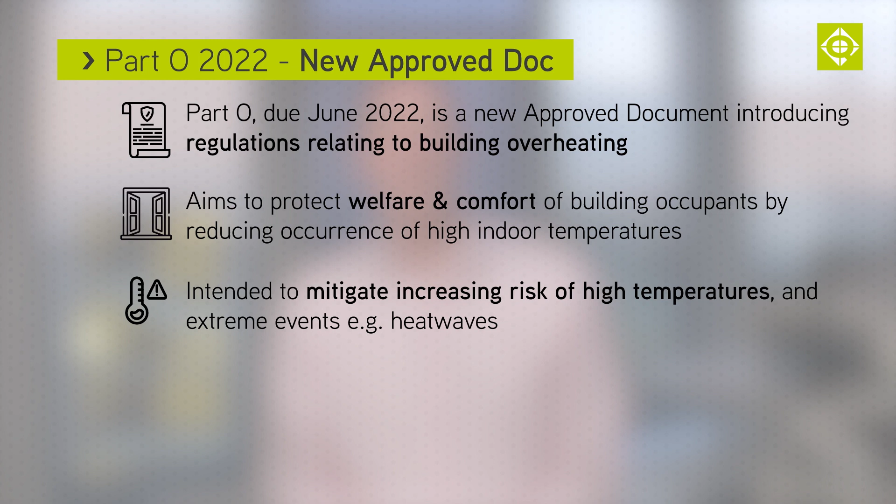It is a response to buildings where occupants have experienced high temperatures that impact on their quality of life. It also addresses the changing methods of construction, with lightweight structures or modern methods of construction becoming more popular.

The new Part O for overheating comes into effect on the 15th of June 2022. It applies to new residential buildings such as dwellings, flats, student accommodation, HMOs and care homes, but does not apply to hotels. It includes the shared and communal areas within residential buildings, such as the concierges, the lounges and the dining rooms.

In mixed-use buildings, it does not include the non-residential purpose groups or class types, such as ground floor retail or office floors. Currently, residential buildings formed by a material change of use are not within the scope of this approved document.

Reasonable provisions should be made to limit unwanted solar gains in summer and provide an adequate means to remove heat from the indoor environment. The safety of any occupant and their reasonable enjoyment of the residence must be taken into account. Mechanical cooling may only be used where it is not possible to remove sufficient heat from the indoor environment without it. Of course, the approved guidance cannot guarantee the comfort of the building occupants, as everyone has a different tolerance to comfortable temperatures.

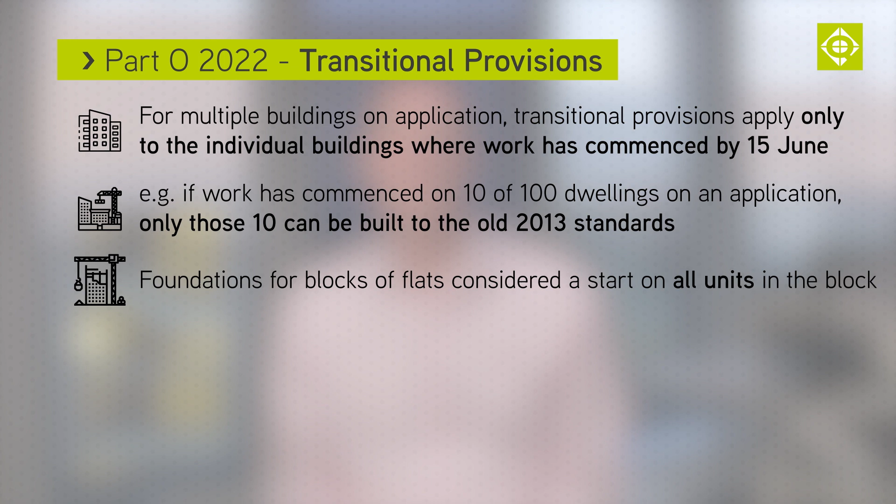For multiple dwellings or buildings on an application, work on each unit must have commenced for the transitional provisions to apply. For example, on an application for 100 dwellings, applications must be submitted and the work on all 100 units must be commenced. If just 10 dwellings have started, the remaining 90 dwellings must comply with the new Part O. Foundations for blocks of flats are considered to start on site for all the units within the block.

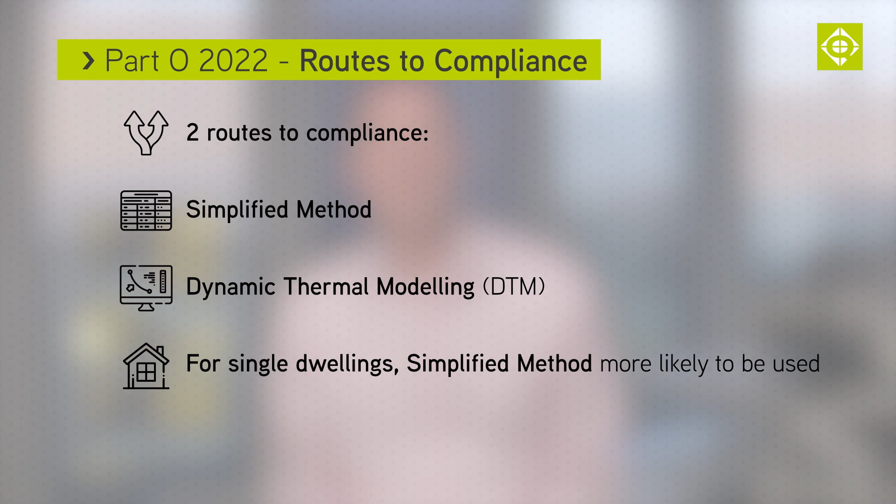There are two routes to compliance contained within the approved document. There is the Simplified Method and the Dynamic Thermal Modelling Method, or DTM. For dwellings, the Simplified Method rather than DTM is likely to be used.

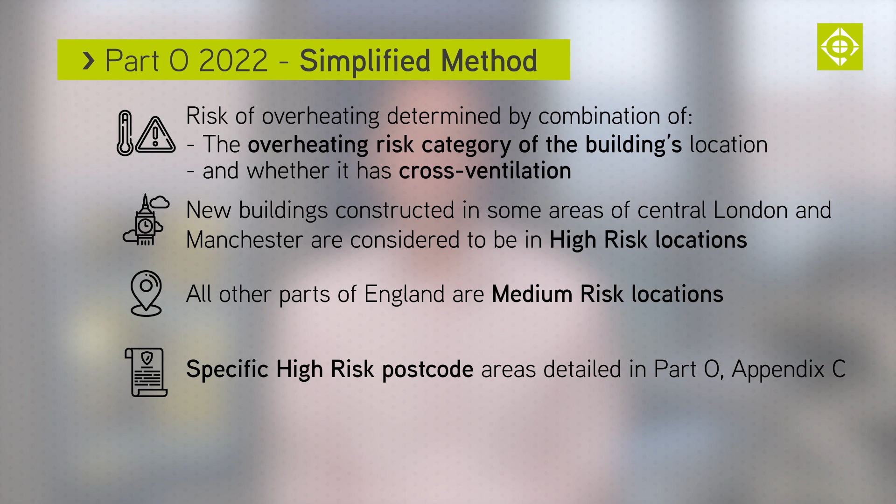For the Simplified Method, the strategy to reduce overheating is selected according to the location of the building and whether it has cross ventilation. New buildings constructed in some areas of central London and Manchester are considered to be in a high-risk location. All other parts of England are considered to be medium-risk locations. Specific high-risk postcode areas are detailed within Appendix C of Part O.

The risk of overheating is determined by a combination of the building's location overheating risk category and whether it has cross ventilation. To be considered as having cross ventilation, new residential buildings need to have openings on opposite facades. Single facade and corner flat units do not have cross ventilation. Each residential unit, shared communal room or common space should be assessed separately.

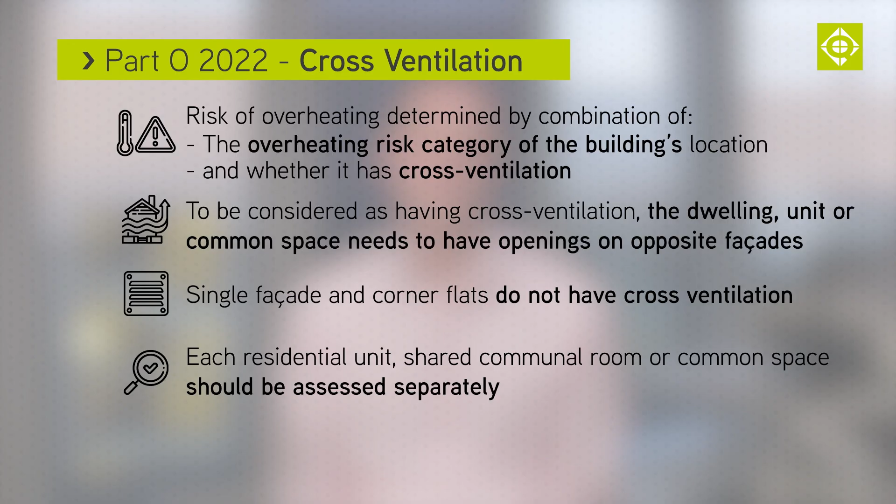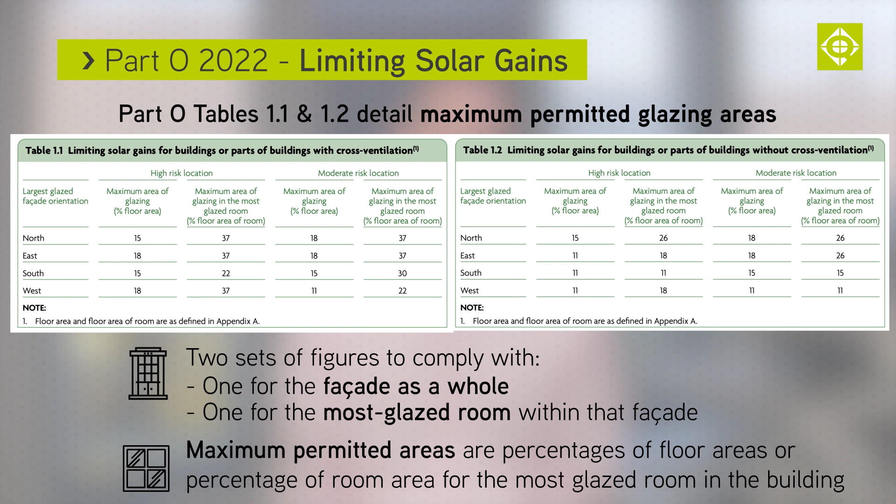Buildings in high-risk locations should also provide shading for glazed areas at certain points. Means for achieving this are detailed in the approved document.

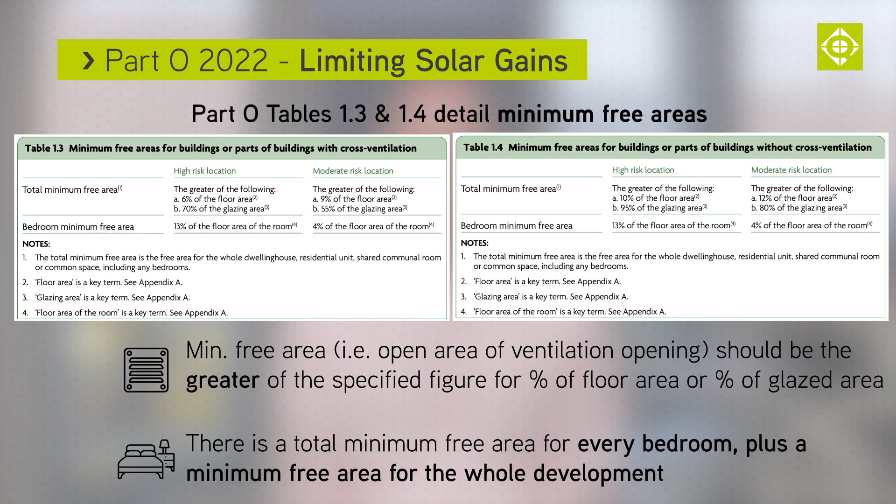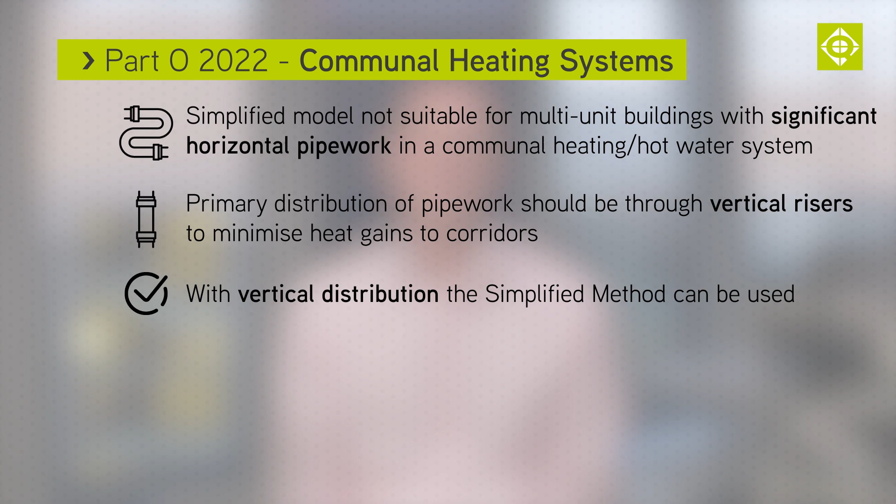The simplified model is not suitable for multi-unit buildings which use a communal heating or hot water system with significant horizontal pipework. Primary distribution of pipework should be through vertical risers to minimise heat gains to corridors. With vertical distribution, the simplified method can be used. In some cases, e.g. buildings with very high levels of insulation or that are shaded by the neighbouring environment, DTM may offer more design flexibility.

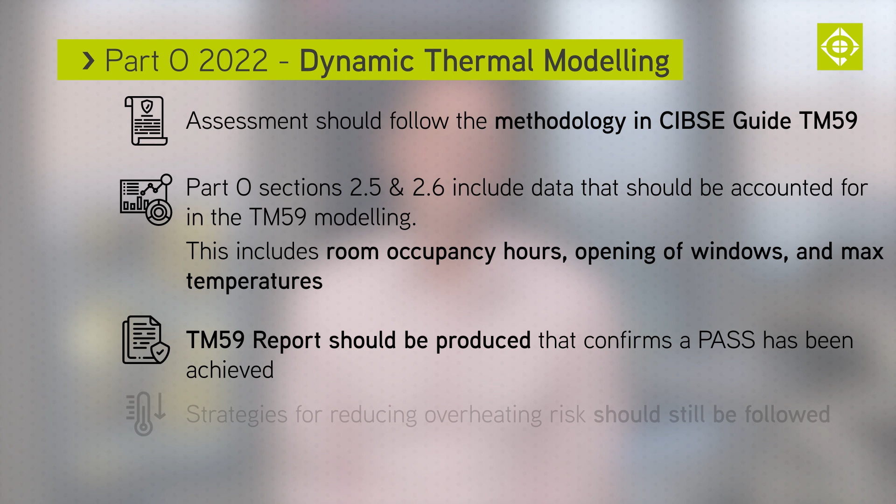The assessment should follow the methodology contained within the CIBSE Guide TM59. Part O, Section 2.5 and 2.6 details some data that should be accounted for in the TM59 modelling. This includes room occupancy hours, opening of windows and maximum temperatures. A TM59 report should be produced that confirms a pass has been achieved. Strategies for reducing overheating risk should still be followed.

Solar gains in summer should be limited by any of the following: glazing design size, orientation, the G value of the glass, the depth of the window reveals, fixed shading devices, shutters, external blinds, overhangs, awnings, placement of balconies, shading provided by adjacent buildings, structures or landscaping. However, foliage, internal blinds and curtains should not be taken into account.

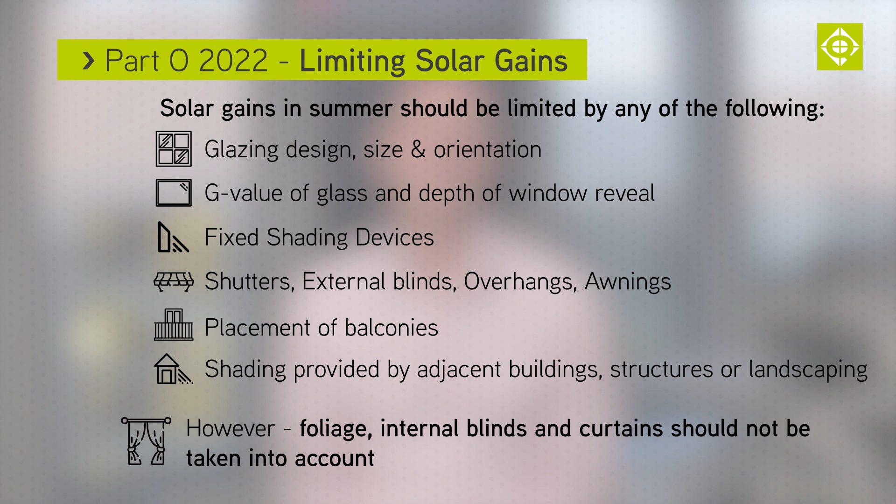Excess heat should be removed from the residence by any of the following means: opening windows, ventilated louvers in the external walls, mechanical ventilation systems and mechanical cooling systems. Passive means should be used as far as is reasonably practicable. Mechanical cooling can only be used where requirement O cannot be met by using opening windows or other passive means.

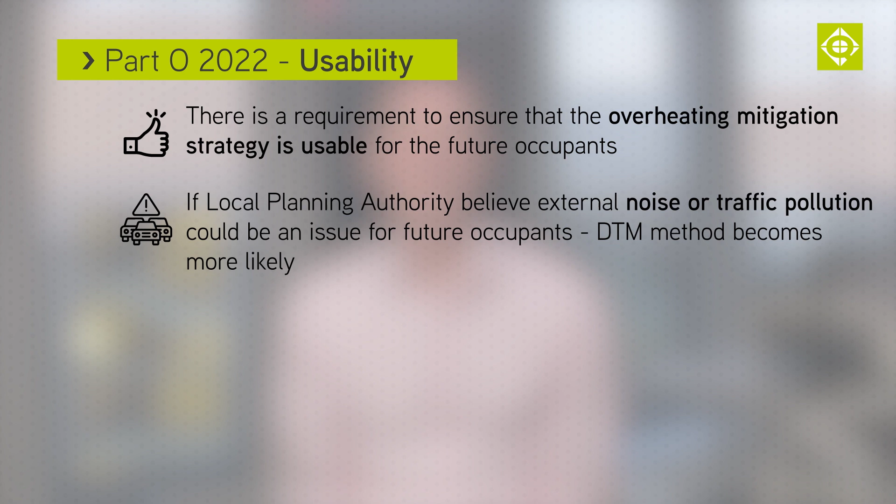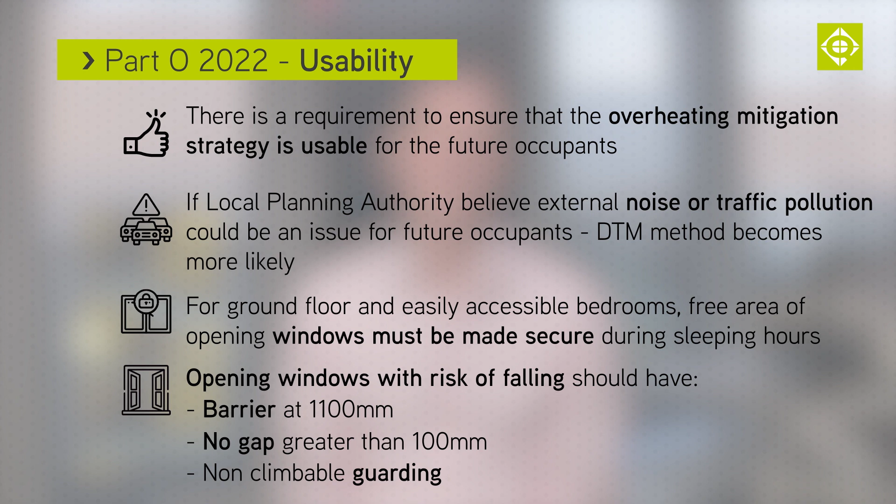There is a requirement to ensure the overheating mitigation strategy is usable. If the local planning authority consider that external noise or traffic pollution is an issue for future occupants, the DTM method becomes more likely. For ground floor and easily accessible bedrooms, the free area of opening windows must be made secure during sleeping hours. Opening windows with risk of falling should have barriers at 1100mm and no gap greater than 100mm with non-climbable guarding. And looped cords must be fitted with child safety devices.

The new approved document Part O includes details of interactions with other approved documents. This avoids the risk of silos, where a building meets one part of the building regulations but contravenes another part. This is a response to criticism contained within the Hackitt report. The new approved document O is more onerous than some guidance in approved documents parts F, K, Q and other parts of the building regulations. Where there is any conflict, the more onerous requirement would always apply.

To prove compliance with the building regulations, it is likely that the building control officer will need to see an overheating calculation for each new dwelling. However, it would be advisable for the designer to complete these calculations at the earliest opportunities. Within 5 days of completion, the person carrying out the work must provide user information to the owner about the overheating mitigation system. The information to be provided can include overheating mitigation strategy, the TM59 assessment or the calculations of the simplified method. Location of equipment and features, instructions, controls, sensors, maintenance and operating instructions should also be provided.